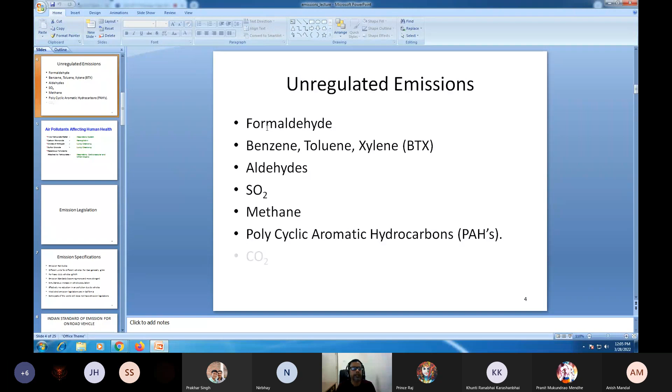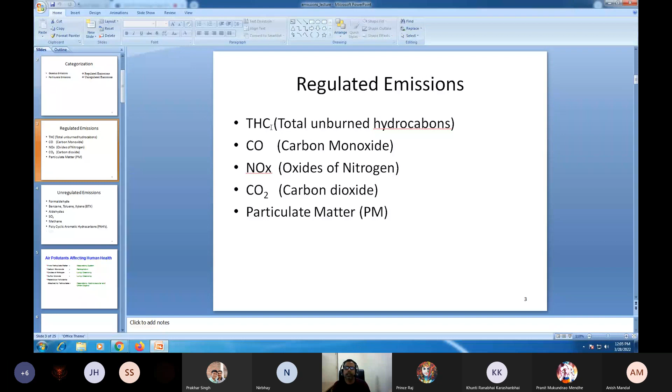We discussed that there are different categories of the emissions, and then after that we defined that whatever the emissions coming out from the engine exhaust, they have been divided into two parts. One is called regulated emissions, and another is called unregulated emissions, and what is the effect of the pollutants on the human health as well as the environment. Then we also discussed the emissions legislations, the procedure, how to do the testing.

In that testing, I just forgot to tell you that we have in India, in Pune, a government organization called ARAI, Automotive Research Association of India, something like that. I just forget the name. That organization is responsible to do the testing for emissions. If ARAI gives the certification that yes, your vehicle is fulfilling the current emissions legislation, then you will be in the position to launch.

It's not like the automotive industry will do their certifications by themselves and then launch the car. There are proper government agencies in Pune, and the automotive company has to get the certifications from them. In fact, you have to take one of your vehicles, and then the actual testing is going to be there, and whatever results you get at that point, it's going to be the final decision.

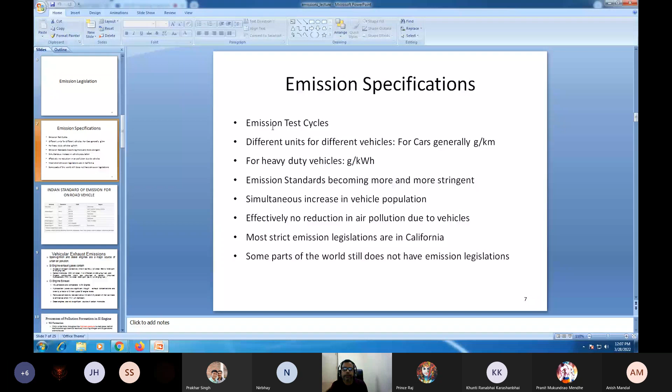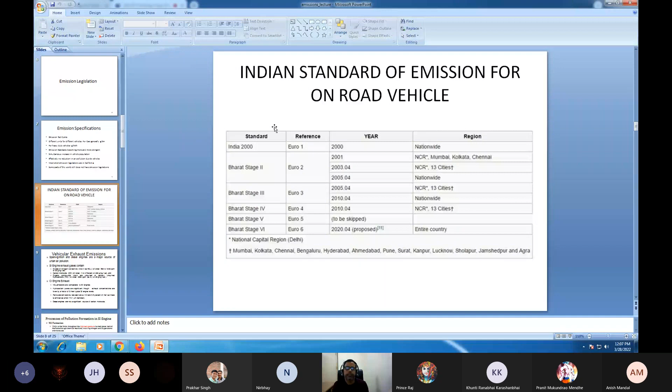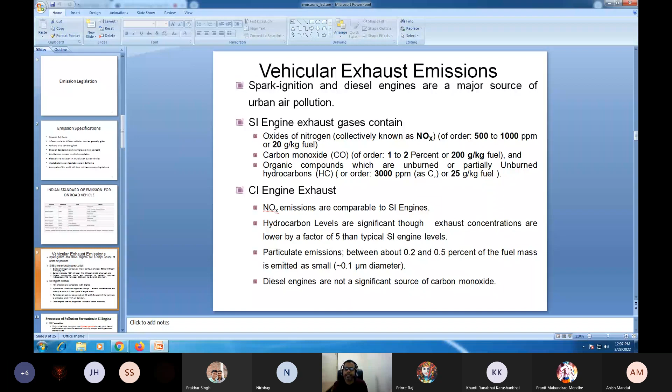Then we also discussed the history, particularly the Indian history, how the different Bharat stage norms have evolved over the two decades, and currently we are having Bharat Stage 6, and then we discussed the approximate range of the different regulated pollutants. All these things we discussed in the last class. Today, let us start. In a very short format, we will try to understand the reason these emissions form.

One of the major pollutants that we discussed in the previous section is NOx. What is NOx? NOx is the combination of NO plus NO2. It is the oxides of nitrogen, NO plus NO2, in which NO concentration is dominating. It depends upon the kind of engine. At this point, it's better to clarify: the NOx coming out from the SI engine is mostly NO. Very few percentage of NO2 will be present in the NOx coming out from the SI engine.

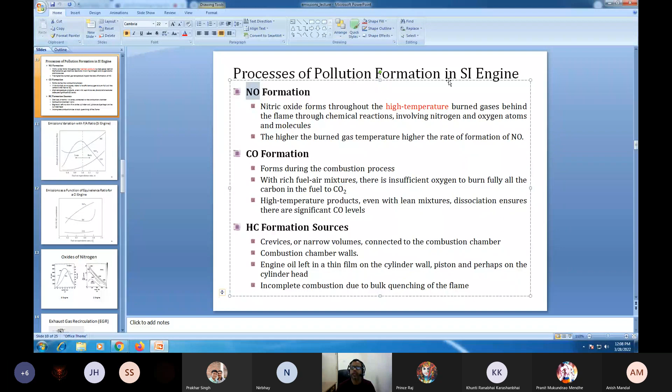Okay. However, we cannot neglect it in the CI engine, where the NO2 concentration has a significant value. It will always be less than the NO, or we can say that NO2 by NOx can go up to maximum 30%. So it is a considerable amount; we cannot neglect NO2. We cannot say that NOx is only NO in case of CI engine, but in SI engine, you can say that NOx is nothing but NO.

So how does NO formation take place? That's the most important thing. In our very simple analysis of combustion, we assumed that nitrogen present in the air used as the oxidizer doesn't participate in the combustion, and the whole nitrogen comes out in the product form. But it's not like that. The environment inside the combustion chamber, in terms of temperature, is favorable, above the critical values where nitrogen will participate in the combustion.

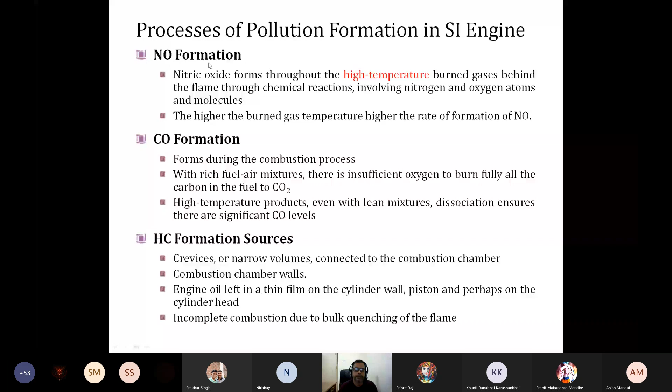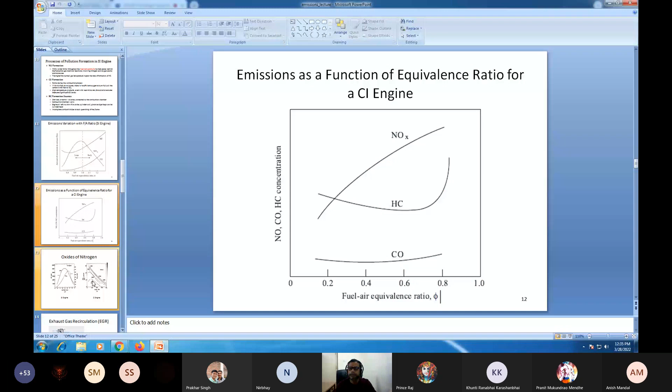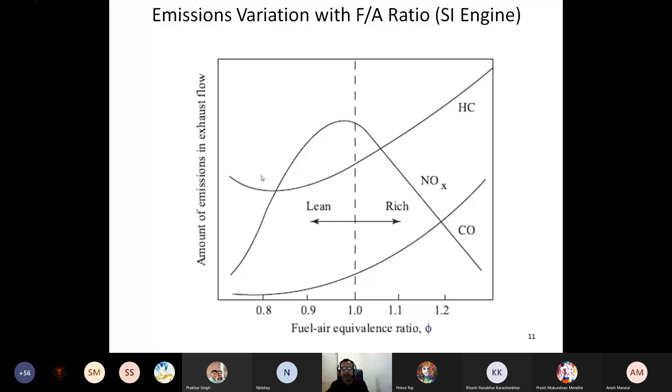All these curves I have taken from the Heywood book. I am already explaining almost everything, but for more material or understanding, you may read the book once again so that it is completely clear. But anyway, I'm describing and covering most of the things.

This curve is for the SI engine and the CI engine with respect to the air-fuel ratio, the same story that we have already discussed, but this is only showing the specific oxides of nitrogen, that is NO and NO2, for the SI and CI engine.

So this left-hand side y-axis represents the NO emission, and the right-hand y-axis represents the NO2, and on the x-axis we have the air-fuel ratio. As I told you, now see the concentration. In the SI engine, the NO emission is coming in the thousands: 2000, 3000, 4000. But if you see the NO2 concentration, over the entire range of the air-fuel ratio it is hardly 50, 60 or 70 ppm.

And based on that, I made a statement previously that NOx in the SI engine is mainly NO. The NO2 contribution is almost nothing. However, now see what is happening in the other engine. This is NO2 by NOx, the ratio of NO2 to NOx in percentage, and these curves indicate the different speeds versus the load on the engine. You can see that this ratio goes up to 30%.

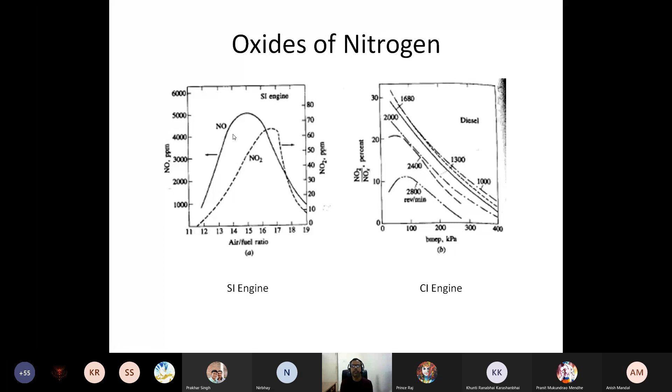So we cannot make a statement in the case of the diesel engine that NOx is only NO. It is not like that. It is a mixture of NO plus NO2. But in the SI engine, we can make a statement that NOx is almost nothing but NO. Okay.

Now, one very important technology that we are going to discuss right now.

Yeah, I think we have enough time.

That is called exhaust gas recirculation, EGR. At this point, we need to discuss these things. We discussed what the root cause for NOx formation is. The root cause is the temperature above the critical value, and at that point the availability of oxygen. These are the two reasons. Because of that, the nitrogen available will participate in the combustion with the oxygen and form NOx.

There's a famous mechanism, I think you should know, called the Zeldovich mechanism: when the temperature and oxygen availability are there, how nitrogen reacts with oxygen atoms and molecules to form NO and NO2. Zeldovich is the name of the scientist who developed the kinetics of NOx formation. So NOx formation mainly follows the Zeldovich mechanism. There are 3-4 steps of equations. You may find them in the Heywood book if you have much interest in the kinetics of NOx formation.

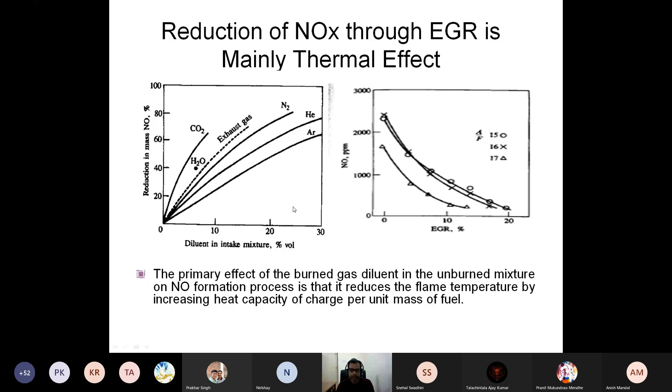What happens is that the exhaust gas, EGR, is nothing but a mixture of so many gases. If you see, okay, leave it like that. The heat capacity of the exhaust gas is higher than the air. The heat capacity of the exhaust gas, particularly the carbon dioxide, has a higher value than the air.

So when part of the EGR mixes with the air, what will happen? It will increase the heat capacity of the overall mixture. We are giving the same amount of energy, but because of this EGR mixture, the heat capacity of the mixture has increased. For the same amount of heat, if the heat capacity has increased, the rise in temperature will be lower. That is the same principle used in EGR to reduce the temperature, and it will reduce the emissions.

Several people can say that once we mix the EGR, oxygen availability is going to be reduced because it is replacing partial oxygen or partial air. Yes, these possibilities are there, but the important thing is that when we do experiments with EGR, we will find that a small fraction of EGR does not considerably affect the performance of the engine, but it significantly reduces the NOx emission. So it's a good trade-off.

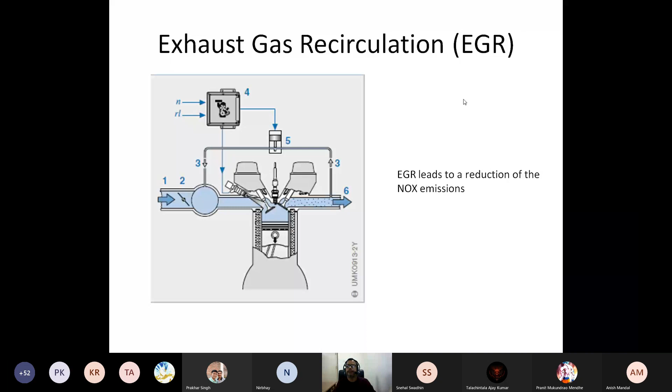So EGR is used to reduce the NOx emission, or reduce its formation in the combustion chamber, by lowering the temperature, because the heat capacity of the exhaust gas is higher than the air. So the overall heat capacity of the mixture increases. So for given heat, the max rise in temperature is going to be lower. That is the basic concept. If you have any questions, then please ask.

So is EGR used in all automobiles, or is it a high-end technology? No, EGR is used in all. I'm not saying in two-wheelers, but in all sorts of four-wheelers. Just trace it, go and see the exhaust manifold. You can find that the exhaust and the intake manifold are interconnected with a pipe, and in between a small device is attached, because that controls the amount of EGR.